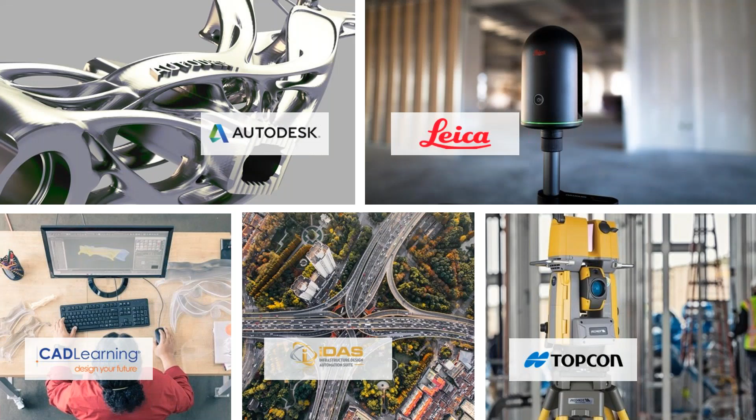Baker Baynes consult in the following industries: build, civil, energy, manufacturing, and process plant and mining. Helping Baker Baynes to success and enabling the consulting work that we do is the support of leading technology that we have chosen to represent. The main brands include Autodesk, CAD Learning for our blended learning approach, IDAS, a tool we use to automate our civil designs, interior design scanning by Leica, and scanning construction sites with Topcon. The iAdopt is our unique way to assess, educate, and consult with your company to help you reach your full potential.

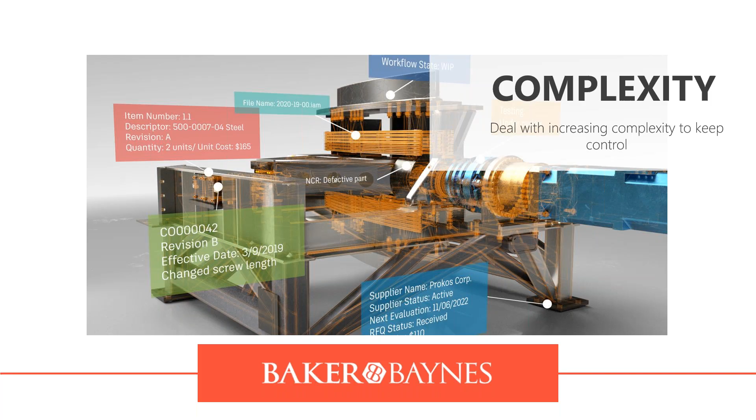So let's look at how Vault can help you design a better world. Products are becoming more complex. There's more expectation for designs to be created faster, and with greater accuracy, even with more supporting information like metadata and visualizations. Nearly 1 in 3 companies say they worked on wrong or outdated data.

Efficiency gains are made by solving problems like these, making sure the right data is available to the right person. This could relate to a release version or a revision of a drawing. For example, many companies struggle with the basics of PDM: controlling, accessing, and sharing product data. For those that work with CAD files every day, it's probably no surprise to see finding the right information and wasted time searching for data are challenges.

It's reported by almost half of our clients. Non-value added tasks could be a number of things. 20% of technical resources are spent on non-value added tasks, like finding the correct data, re-entering information into another system, or waiting for sign-off, check, or approval. Wasted engineering productivity is one of the most common reasons companies begin to consider PDM.

More than 40% of companies report an issue with collaboration. Collaboration is an essential part of the development process, but nearly half of our clients said it was a significant challenge. There are collaboration issues internal to the technical resources, such as working on wrong or outdated data, but just as common are challenges with working with other departments inside the company as well as outside the company, such as customers or suppliers. What is the common thread then? Access to data.

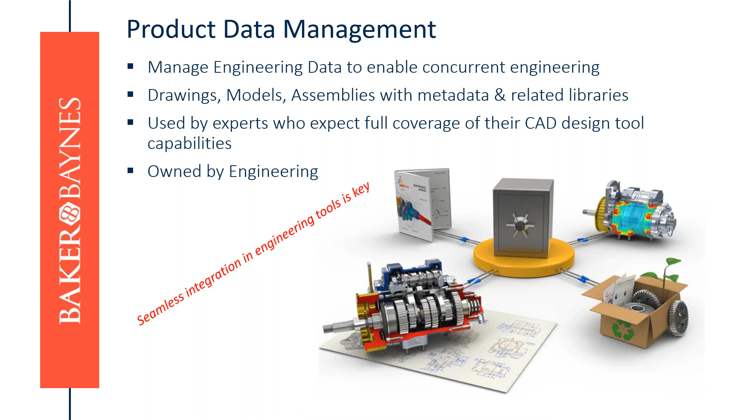In the following example, we are looking at an assembly created in Inventor. The aim is to rename one of the parts. We open it from Windows Explorer, verify that it's the correct assembly, close Inventor, and rename the part. We will rename it to part 13.

However, if we open the assembly, the link broke and it's asking you to fix the problem.

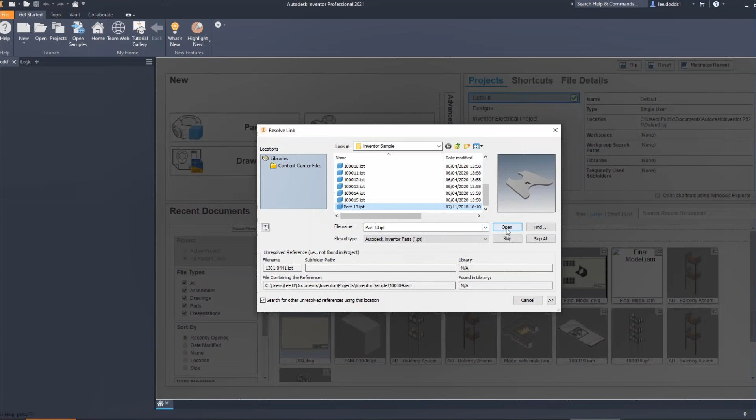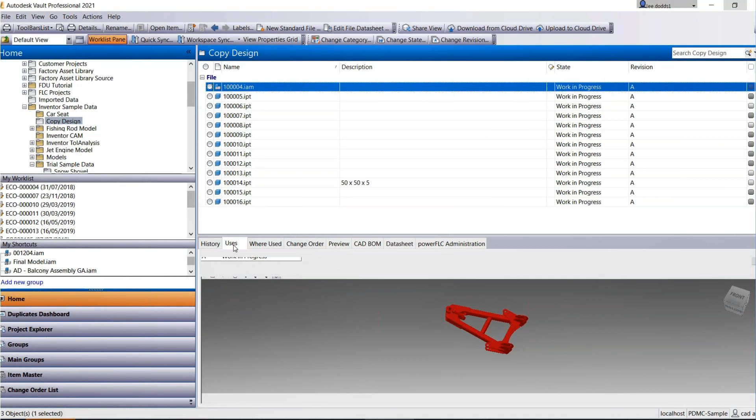I will now demonstrate how much easier it is to rename a part in Vault without breaking any links. We will go to the assembly drawing and preview in Vault without opening Inventor. If this is the correct assembly, we open the Uses tab and expand the ladder. All the parts linked to this assembly are displayed. We right-click on the applicable part, choose Folder to take us to the folder where the parts are saved, right-click on the part, click Rename, and the Rename Wizard dialog box will open. Choose the file, click Next.

In this organization, we have a standard numbering system, and Vault will therefore generate a number accordingly. You can choose what type of scheme you are renaming. In this case, it is an organization drawing. Click OK, Finish, and Close.

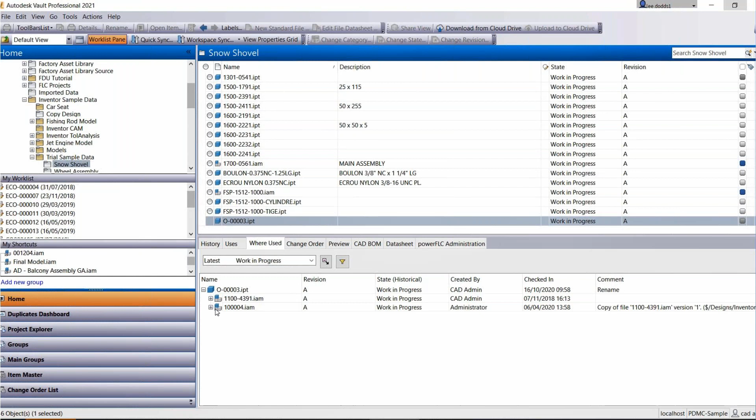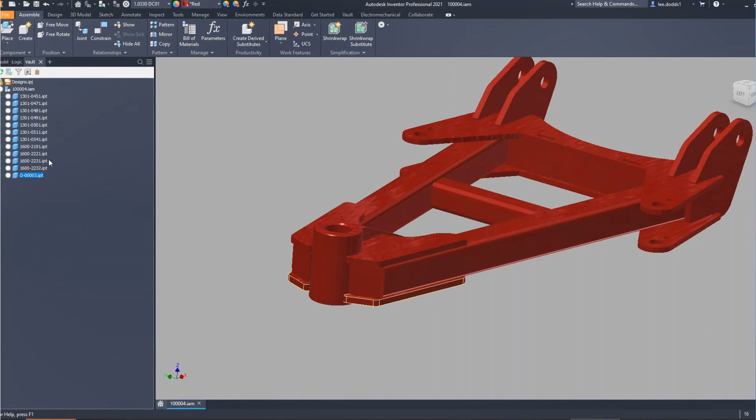The part was renamed. If you click on the Where Used tab and expand the ladder, you'll find it is still linked to the assembly. Right-click, go to the folder, and ensure that the assembly still shows its link to the part. When you expand the ladder, you'll find it there. When we now open the assembly through Vault, the Resolve Link dialog box disappeared. All files are intact and the specific part was renamed.

So, advantages of concurrent design: centralized backup and design standardization. At the same company, we implemented Vault about 5 years ago, and it made the world of difference. Engineers were able to look at the files but couldn't make changes to them. We no longer had a situation where an engineer saved his drawing in a different location where no one could find it. It was easier to copy designs and standardize our schemes, and this saved a lot of time.

Let's take a look at how we manage concurrent design using Vault.

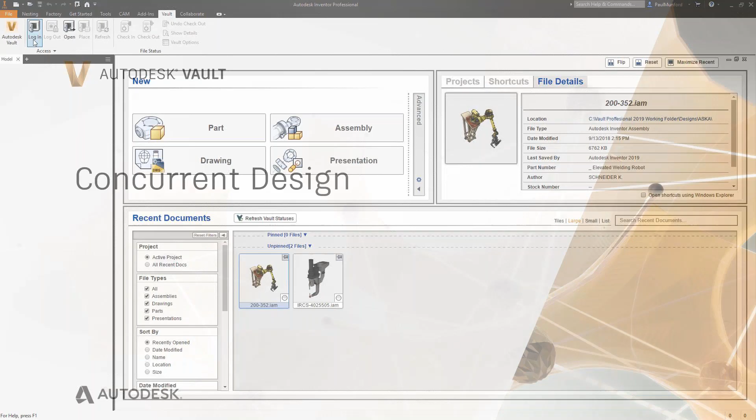Control access to design data and enhance team productivity by allowing your entire team to participate in the design process concurrently. By enabling concurrent design, Autodesk Vault allows your team to balance resources, helping you finish projects faster and meet your tight deadlines.

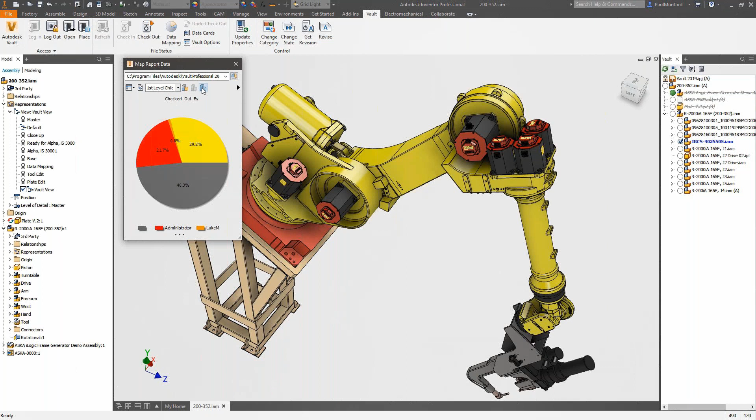Concurrent working means that designers can work on the same project, even the same assembly, at the same time. In this example, Paul needs to make changes to a part's design. When Paul logs into the Vault, he can quickly check the status of the design and sees the assembly containing the part is available to be checked out.

At the same time, Luke also needs to make a design change to a different part, but the same assembly. When Luke logs into Vault, the browser makes it immediately clear Paul is already working on this assembly, but that is not a problem since Paul's change is for a different part, so both designers can work concurrently on the assembly together without the risk of overwriting each other's files.

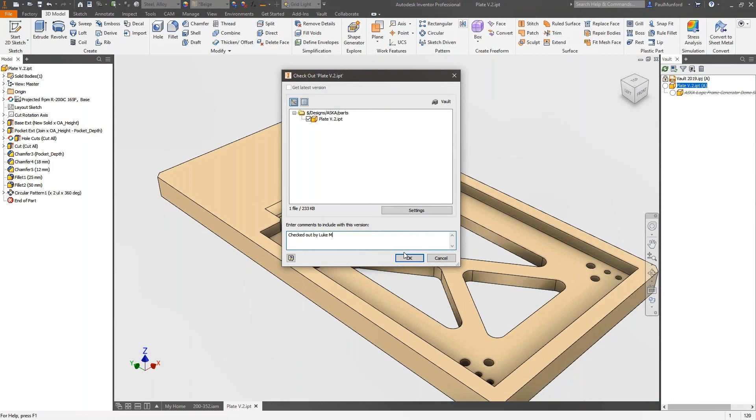Not only does this make design communication faster and easier, but Paul and Luke can see each other's changes as they happen. When Paul is done with his update, he checks his changes back into the Vault. Luke can continue knowing that he's the only one editing his part and that the assembly is completely up to date. Whether your teammate is in another cubicle or another continent, concurrent design can help you work more closely than ever before.

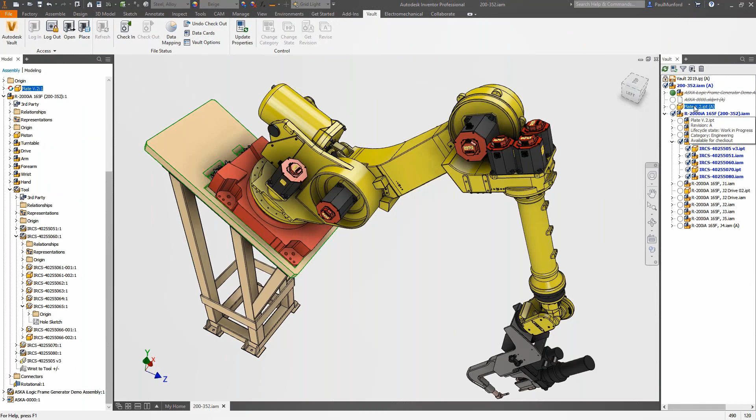So product data management within Autodesk is Vault. Here's some stats around our current user base. The Vault customer base is now over 10,000 customers, from 5 users to thousands of users.

Over 150,000 active users are leveraging Vault solutions to manage their data. Those users are creating and managing more than 1.5 billion files in Vault, Inventor files, AutoCAD drawings, and many other file types. For a long time, Vault has been a best-in-class data management system for storing all your product and project-related information. Whether you're an AutoCAD user storing drawings or an Inventor user storing models, all these internal stakeholders have access to a centralized database of data and related information.

File lifecycles and engineering change orders help users control access to data and track what changes need to be made and why. In the Find dialog box, you can do title block indexing, basic and advanced search, search text on drawings, and there's a lot more information that you can find. Find what you need when you need it.

If you are looking for a specific design, but you can only remember that it was a gear, you can type the criteria that you know, and Vault will find all the drawings that match this criteria.

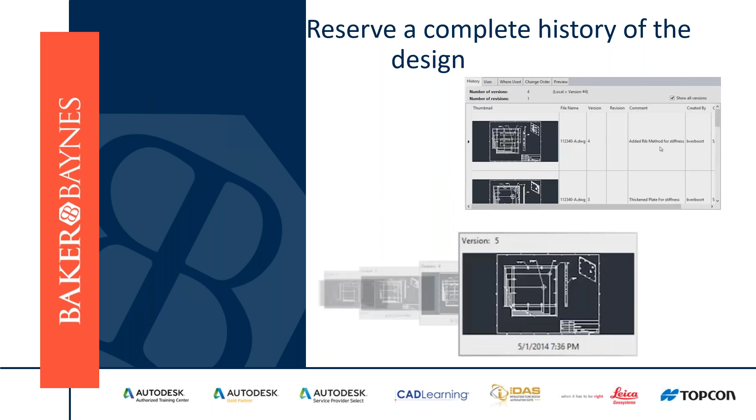In my role as a supervisor, it was quite handy to see the history. Part of the task that the draftspeople had was to always submit a comment when they checked the drawing back in. It makes it easy to follow up what was changed by who and when.

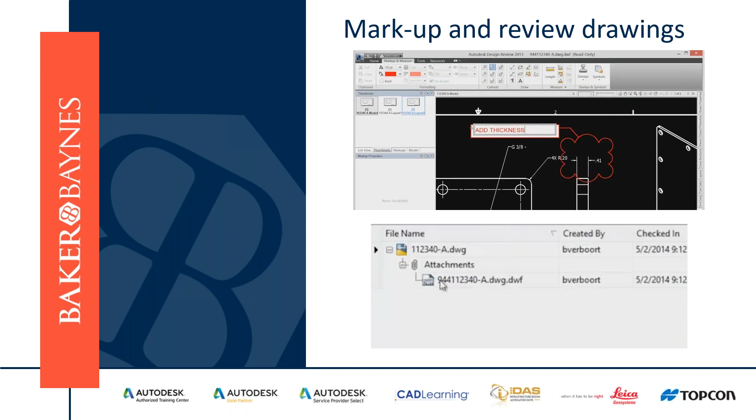With the lightweight drawing viewing, you can easily do markups and use the annotation tools. You can also associate the markups with drawings, attach it to ECOs, or create a task for a specific employee.

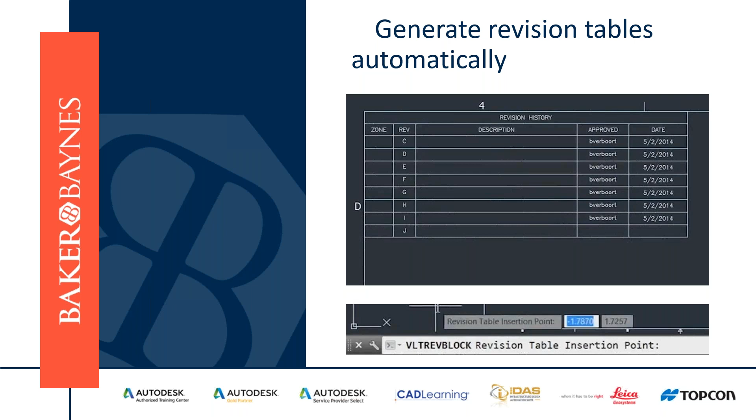Another repetitive task is manually updating the revision block in the drawing. Using the VLTREVBLOCK command, this is automatically populated and will update anytime a revision bump is made inside Vault.

There are also some specific capabilities related just to AutoCAD mechanical toolsets. First, there is support for a mechanical structure workflow, such as externalizing a component so the new drawing is managed by Vault with a reference to the original file, and you can see uses and where-used information. In addition, the embedded bill of materials information created by part references are understood and supported.

So Vault and your software. For a long time, Vault has been the best-in-class data management system for storage. All your products and project-related information can be stored in one location. Whether you're an AutoCAD user storing drawings or an Inventor user storing models, all these internal stakeholders have access to a centralized database of data and related information.

File lifecycles and engineering changes help users control access to data and track what changes needed to be made and why. Vault is CAD-integrated PDM. So that means, for instance, inside of AutoCAD, Vault is there. It represents itself up there in the toolbar. There are menu pull-downs showing the current status of files, as well as any links to supporting files.

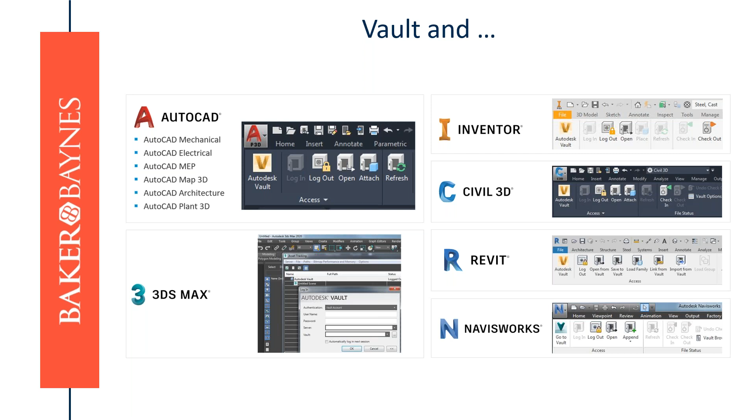And we don't stop there. Most of the Autodesk portfolio will have similar in-application access to Vault. Another cool feature of Vault is reports and/or dashboards that can be created to keep track of project life cycles, materials used, and resource utilization, just to name a few. Let's look at the duplicates report as an example.

For your 3D components, Vault Duplicate Search smartly searches 3D shapes within the thousands of CAD files in your database. You can reduce your design and development time by reusing existing parts, but finding an appropriate part in your database can be challenging when you only have a file name or some metadata to search on. Duplicate parts in your engineering supply chain can cost your company thousands of rands in redundant design, documentation, approval, release, and data management rework.

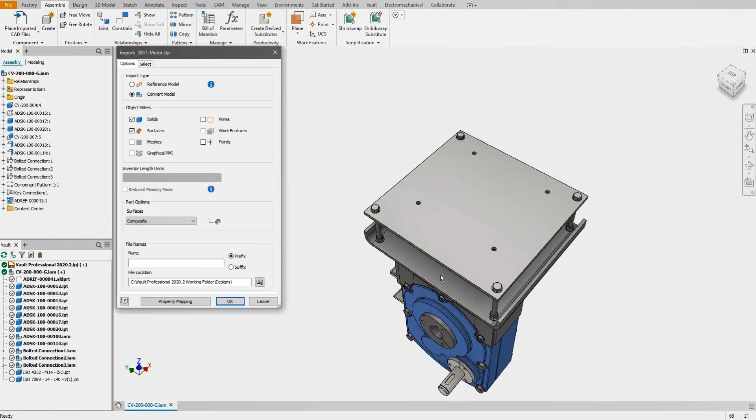Duplicate Search in Autodesk Vault Professional is a new subscription feature that helps you reveal where duplicate parts exist in your design, saving you time and money and increasing standardization across your company.

In this example, we can see a new design that has not yet been checked into Vault. As we run a duplicate search, Vault is queried for components that match the geometry of our existing design. If we see a part that looks like a good match, we can replace the part within our designs with an existing part from Vault.

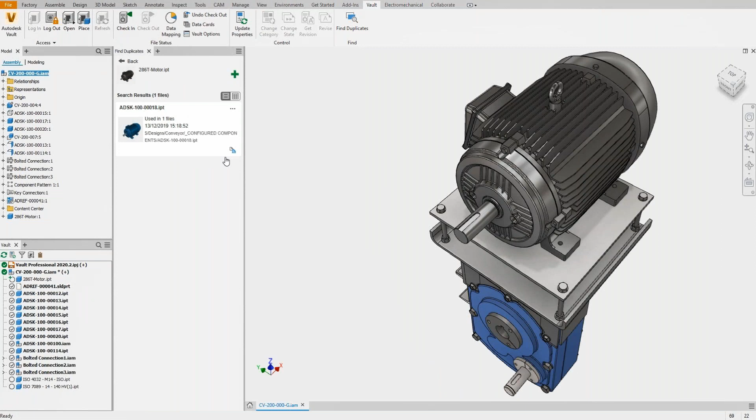When we are confident that we are not introducing new duplicates into Vault, we can check the design in. As we check in the design, Vault will scan the new parts we introduced and add them to the duplicates index. But how can we detect existing duplicates in Vault?

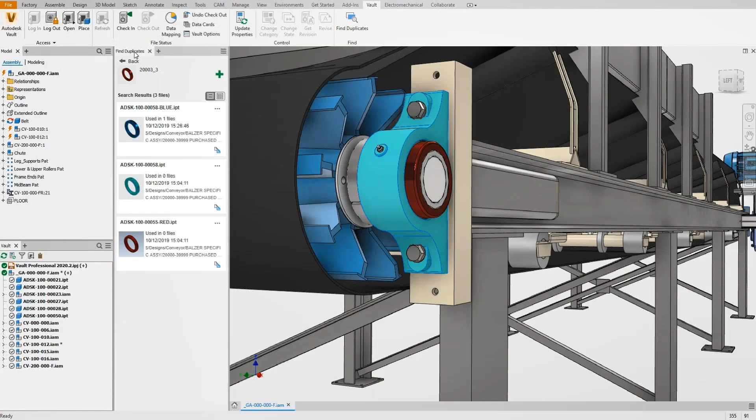The new duplicates dashboard gives us an overview of the number of potential duplicates we have in our Vault. We can now create a duplicate report and begin assessing how we can add value to our business by removing duplicates from the database. Duplicate search in Autodesk Vault Professional helps you reduce design time and downstream parts management cost by allowing you to search a Vault for matching 3D shapes.

Unfortunately, design changes are inevitable, so being able to react to them with the relevant data and information is key. It will help you create a successful product design and engineering department.

This functionality I enjoyed the most. We attached all emails and instructions from the engineer to the ECOs. This eliminated the he said, she said debate. The drawing followed the proper channels for quality control, and we could track where the holdup of each design was.

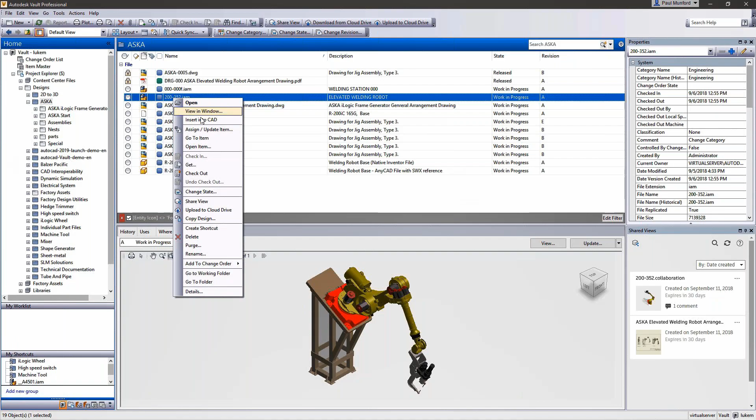Autodesk Vault provides effective and efficient management in tracking your engineering change orders. A change order number is assigned automatically by Vault. You provide a change order title, description, and due date. During the change order process, the design documentation is referenced and additional documents can be attached. Comments can be added and progress is captured automatically.

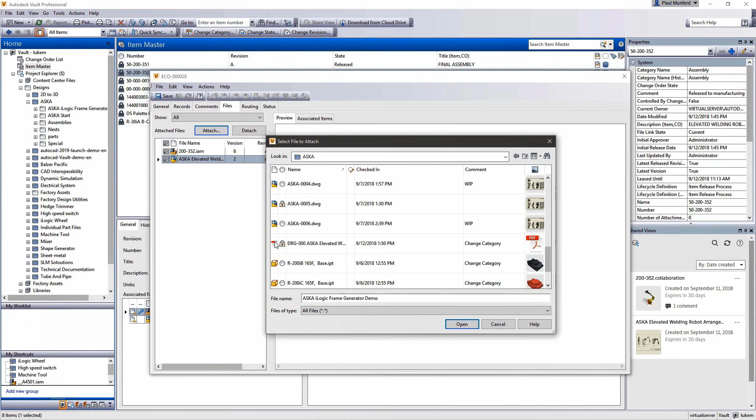Participants in the change order are assigned responsibilities for processing the change order based on Vault's configurable routings. These routings also assign appropriate authority for the user's role. Once saved, the change order process is initiated and progress is tracked and reported. Notifications are provided to responsible participants via email, and open change orders can be seen in your work list.

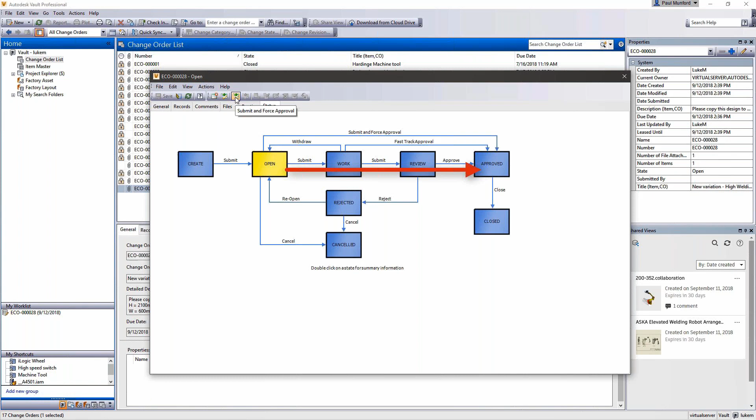Decision makers and stakeholders have authority to process change orders through the workflow in the most appropriate and efficient way. Comments are made, progress is monitored, and notifications are sent automatically, creating an audit trail as the work moves along.

Once a change order is accepted and processed to the point that the design needs to be changed, designers have the authority to edit the impacted documents by moving them into a work in progress state. At this point, Vault can automatically trigger a revision.

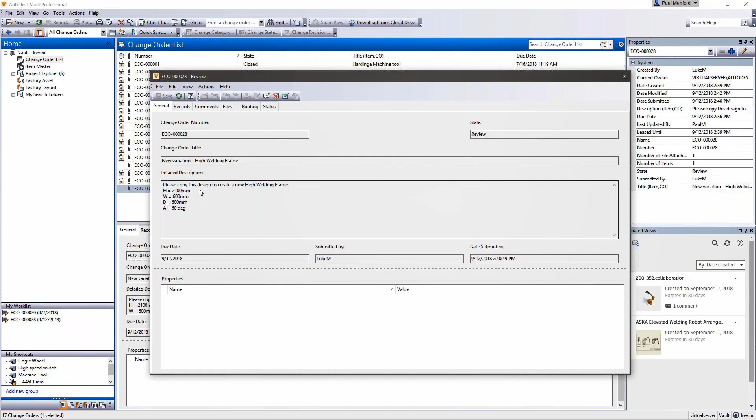Once design documents are edited to reflect the required changes, the change order is processed to the appropriate state. Once changes are verified complete, final approval is given, and the change order can be closed. This releases the design document with the changes. Vault will make the revised and released design documents available to the designated people.

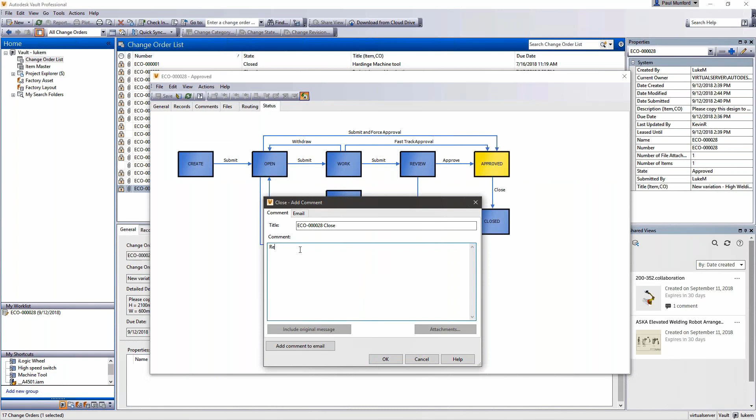Design teams can use standard or configurable processes for release and engineering change order management, helping communicate to avoid costly mistakes and remove process bottlenecks.

So what does that look like in Vault? At a high level, the engineer puts all of the design intent and structure into a CAD model. The way that you structure it, the way that you build assemblies and sub-assemblies, could be because that's how the product is to be built and assembled, designed, or procured. You put all of that design intent into the CAD model, and Inventor does a great job of this.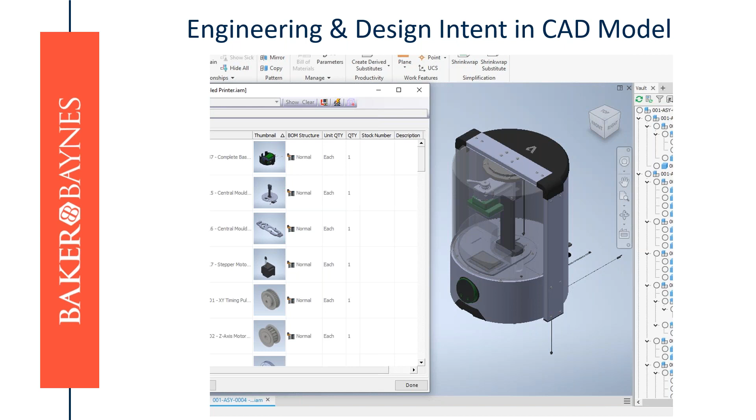It's there, you check it all into the Vault, and there it is, you're looking at the complete assembly. For instance, this 3D printer, you're looking at a complete assembly. There are all of the nested components and everything underneath. The hard work put into part numbers and making sure you have the right components, content center parts, all the libraries, everything is there.

And it's nested and secure inside the best place for it, which is Vault Pro. Vault has the ability to take that model and mine out or extract all that information, and we build what is known as an item that we just talked about.

And it understands all of the nested substructures. If it's an assembly inside an assembly inside an assembly, maybe it has library components, or in some cases you'll notice there's a PC board on there. We can read information from AutoCAD Electrical and put that together inside one complete bill of materials. And that's the power of this.

Because we are inside one application in Vault Pro, the CAD files on one side and the item on the other are all joined together. Vault simply knows all. It knows what's inside of the CAD file and it collects it for you.

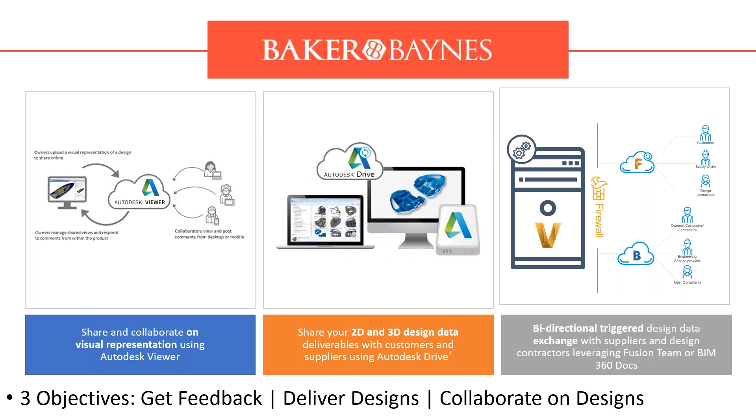Collaboration: we get feedback and share visual representations quickly and easily using Autodesk Viewer. We deliver files to customers and suppliers using Autodesk Drive. We can collaborate on designs or automatically exchange select data with external collaborators using Fusion Team and/or BIM 360 Docs. So we have cloud-based collaboration.

Vault also helps you collaborate with external stakeholders beyond your firewall. For example, it can be a challenge if you're going back and forth with your customer or supplier using email, FTP file transfers, Dropbox, OneDrive, or Box. Those tools are not CAD aware, and information can be lost or miscommunicated. There's too much room for errors and lost time due to file size issues, number of documents, and disconnected information.

Instead, you can simply use a secure cloud-based app called Fusion Team with Vault, represented here with an F, to share design files. External collaborators like customers, suppliers, and subcontractors that you authorize can access shared data and collaborate with you. Vault will take care of keeping them up to date and working with you on the latest version of your project files. It's that simple.

Let me show you how easy it is to share files in the cloud. First, we start by selecting the file we want to share and moving it to a lifecycle state—in this instance, work in progress collaborators. Why is that important? Well, we've set a rule to only sync files in that lifecycle state to Fusion Team.

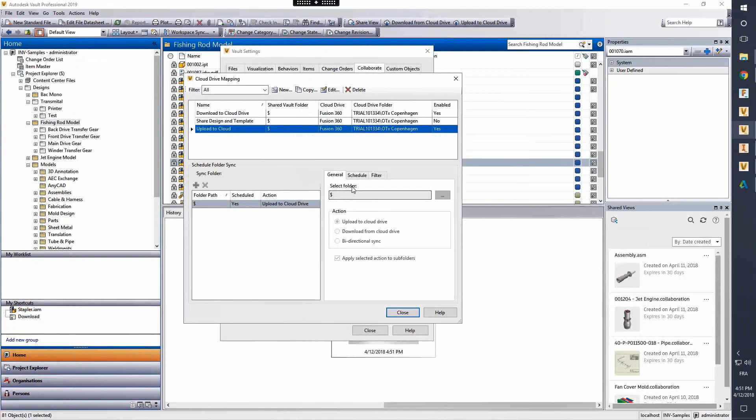We go to Tools, Administration, Vault Settings to configure the cloud drive mapping. We choose the Upload to the cloud option, ensure that nothing is selected in the Schedule tab, as we want this file to upload as soon as possible, and it will upload when the lifecycle is changed. Close the Cloud Drive Mapping dialog box and Vault Settings dialog box.

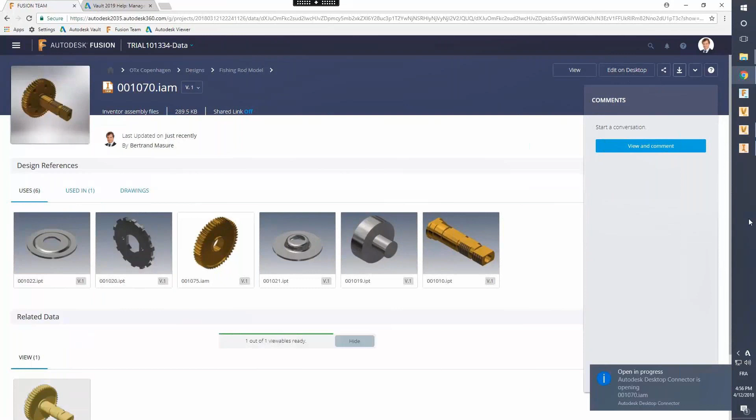In Fusion, you can invite members and give them certain permissions. The supplier, customer, or consultant can now view the file and see all the parts it's assembled with. They can edit it on their desktop. When opening the file, they can add and change whatever they wish to on the assembly or part. They will save the drawing and close the file.

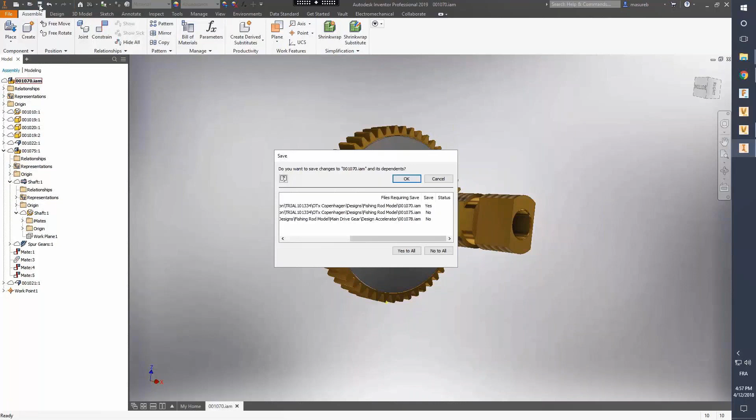Back at our office, we can download the updated file from the cloud drive. Select the download location, run the job processor by pausing and resuming, and the file is now replaced with the updates. No emails going back and forth and miscommunication causing hundreds of hours wasted.

The subject of cloud hosting of data and files is a common concern for business owners. Cloud can mean a number of different things depending on your requirement. Now, as many of you know, we have a wide range of cloud data sharing facilities.

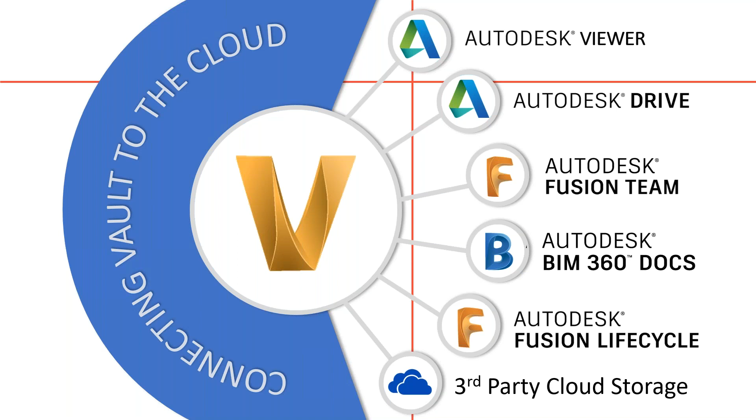This allows Vault users to not only share data internally, but also with external stakeholders. Everything from shared views, using the large model viewer in Forge or Fusion Team, and BIM 360 Docs for external collaboration and file sharing. We also can share product information with our product lifecycle management tool, Fusion Lifecycle.

A nice feature coming up is the mobile app. So why mobile? Flexibility, being able to access your data from anywhere. Here's the Vault client that we're all familiar with. Vault mobile app brings your data to you rather than you having to go to your data.

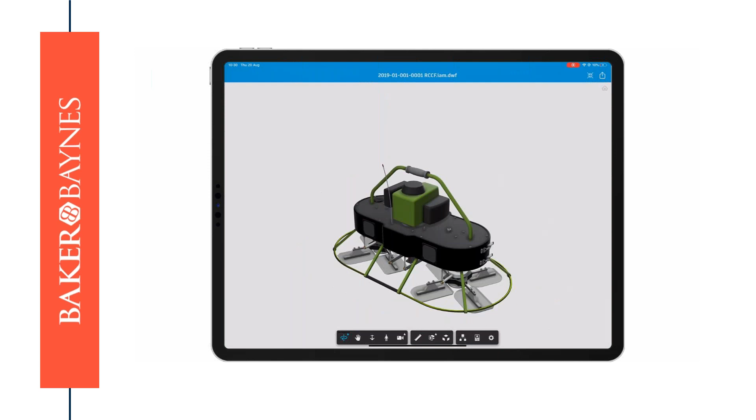Log into Vault while you're away from your workstation using your phone, tablet or computer. Search and navigate your Vaulted data to find relevant files, and browse the file structure right inside the Vault app to find out which files this document references and which files reference this document.

View previous versions of your files and read the associated property information. Vault provides a great way to manage change on your projects through its integrated engineering change orders. Vault mobile app helps you create the change order from wherever you are, directly from your mobile device, and even access the camera to take photos.

Add comments to the change order and submit it into your system. Vault mobile app will automatically sync the change order to Vault, and the new information will be visible to anyone with access to your Vault immediately. Speed up the design process and manage change effectively while maintaining a full audit trail by participating in your change order process from the Vault mobile app.

As soon as you've completed your interaction, your colleague will receive the change order and you can action the change. The change is automatically tracked in Vault and the audit trail is maintained. Once the design change is complete, the change order can be updated and the status progressed.

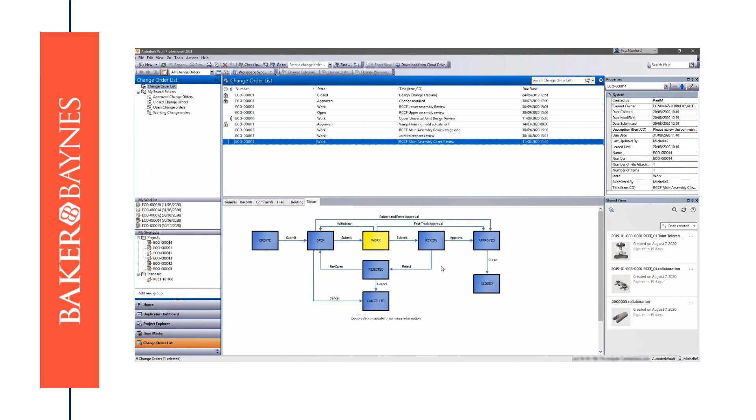The updated change order can be opened directly in Vault mobile app. Comments added to the change order sync between Vault desktop and the Vault mobile app in real time, aiding communication while you're working remotely.

Changes requested in the change order can be reviewed, and on satisfactory completion of the work, the change order status can be progressed. The change order is approved, closed, and the files released for use by your colleagues, all from the mobile app. Free yourself and your data from your workstation with the Autodesk Vault Mobile app.